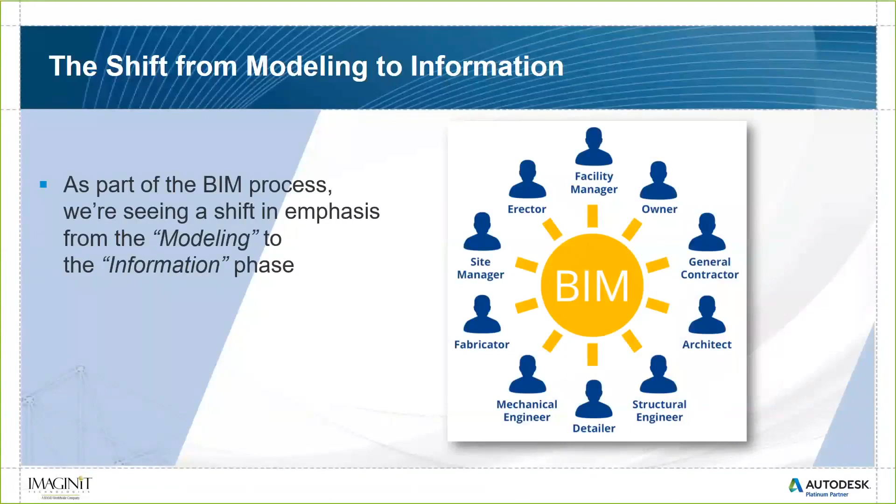So because we have these models now that are enriched with all this information, we're seeing increasing amounts of this data, and now we're trying to derive value basically from that data.

And of course, we've seen that with the cloud technology. And cloud technology in many ways isn't really new. Autodesk was in the cloud back in the very, very late 90s with Buzzsaw when that first came out, and that was absolutely a cloud product. That was way before Dropbox or Box or SharePoint or any of those things. Autodesk had already invested in the cloud almost 20 years ago.

And again, as we all know, everyone's in constant communication. It's almost overload, right? Because it's so hard to manage all that information, whether it be from Facebook, Twitter, Instagram, and all those things in our day-to-day life. And we're running into that with our work life as well.

And again, all this information that is out there, it's at our fingertips. It's on iPads, our smartphones, our computers. Anywhere where we are, we can get access to the information that we need.

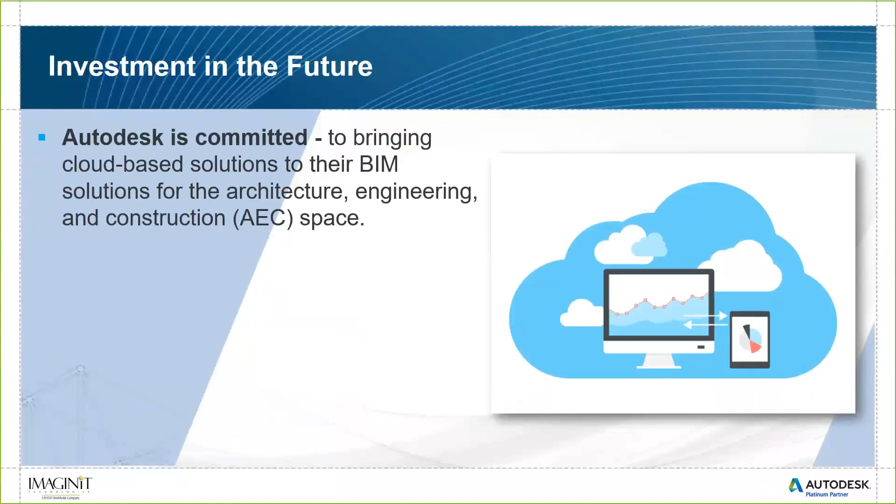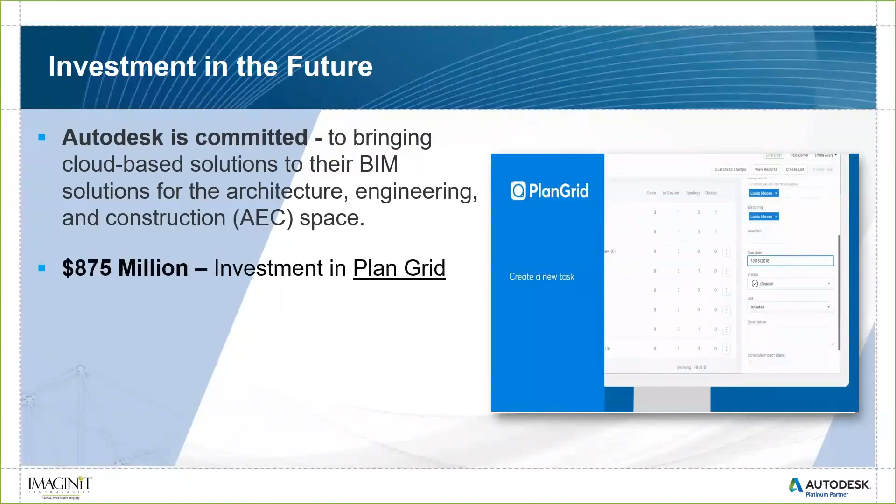So we look at Autodesk here, and they're certainly committed in investing in this future. They understand that this is where we need to be. So they're bringing these cloud-based solutions for engineering into the construction space. This year alone, or even beginning of last year, just for PlanGrid, that was $875 million investment because they saw that was a leader in the construction management industry in the field, and they had some good things there, and they wanted to make sure they could invest properly in that and make a commitment to this.

The same with their investment in BuildingConnected, because that's the other aspect here, bringing in bids and bid management, and then even Assemble Systems when it comes to quantification, cost estimation, things like that. So Autodesk is certainly committed to this industry. Just this year alone, the past couple of months, they've already invested $1 billion. That's not a small amount of money. They're putting out a large amount of their research and development efforts in this technology to make sure that it works and can deliver as promised.

So let's take a look at what do we do in our day-to-day lives as a BIM manager or really as a construction administrator. You're working on site, you're visiting the site constantly, you're gathering information, you're making sure people have drawings, the right versions of drawings and all that.

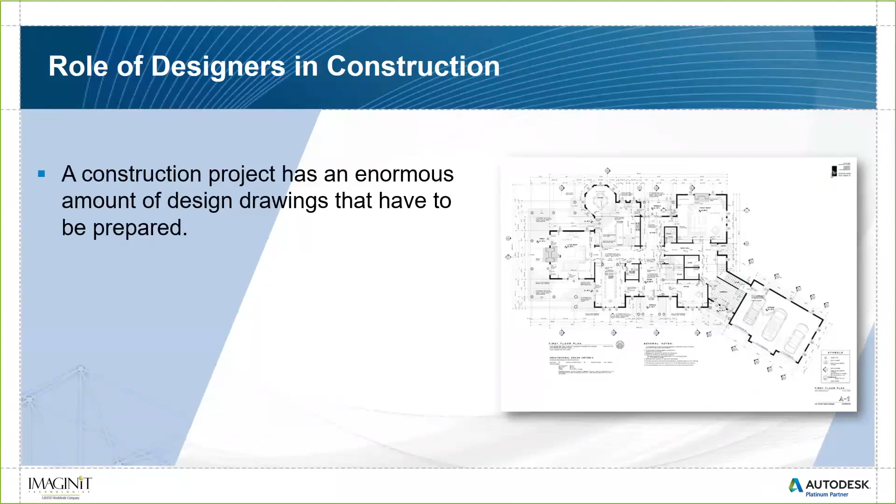So when we look at a construction project, there are countless thousands of drawings that have to be maintained, managed, version controlled, all of that we have to prepare. And really, these drawings are the basis on which the projects are being estimated, they're being built from. There's a lot of responsibility with these documents.

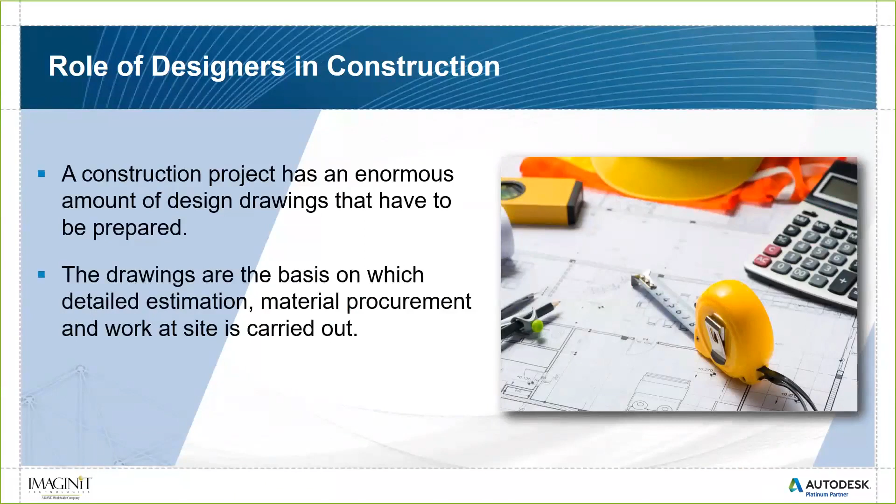And of course, version control is probably one of the most important things, is making sure that everyone has the latest drawing, the latest update, the latest addendum. That's probably by far the most important part of all of this, is not only do the drawings need to be accurate and data rich, but the right version needs to be with the right people, and we need to be able to track that.

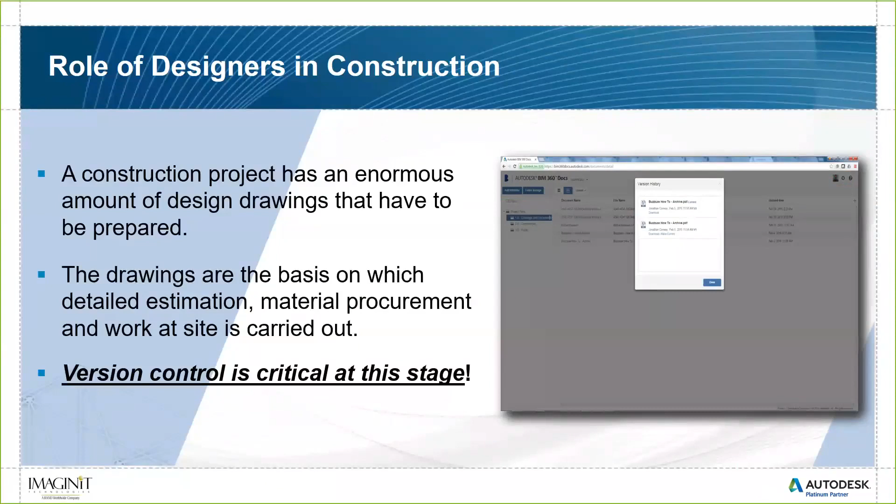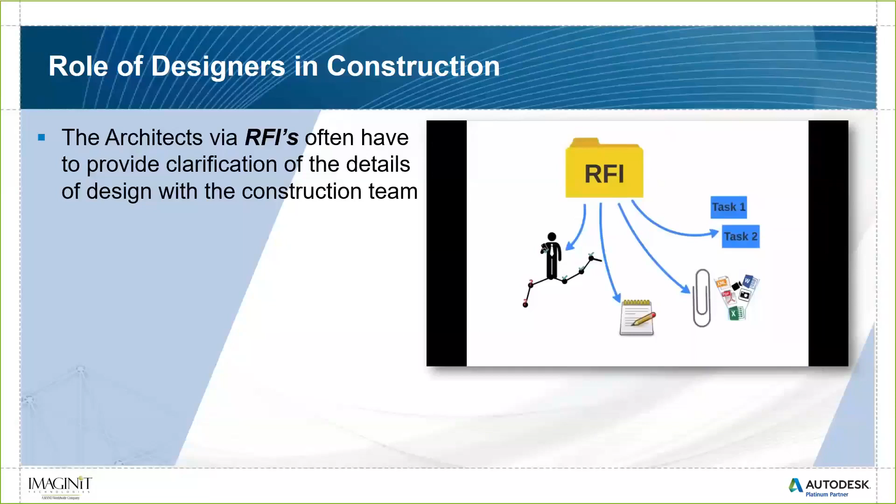And also, when we're in the field, we're often either creating or responding to RFIs. And how are we doing that? We're using paper and pencil and clipboards in the field, paper clips, PDFs, XML files, Excel documents, Word files, even videos, pictures. All those things, we're basically responding to those in different ways. And maybe we have different tools that specialize just in RFIs that are even cloud-based and such.

And we're also managing or participating in the submittal process, and we have to set up a process for each job, how we're going to respond, how we're going to send the information out, how we're going to track it, are we using email, and so on.

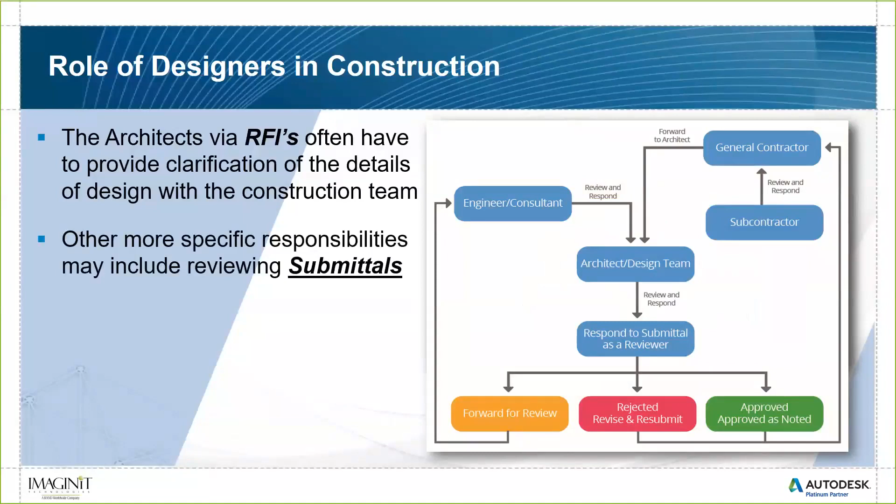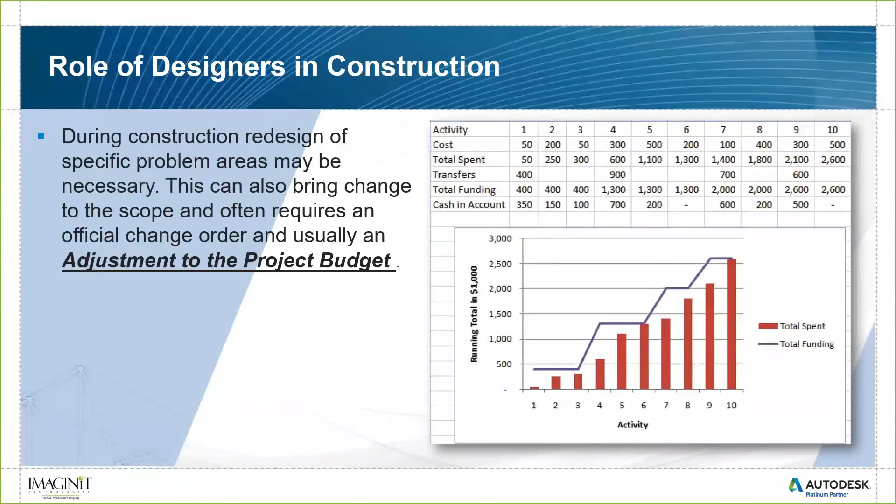And also there's adjustments to the project budget. An owner wants to change a material from drywall to granite, or change the countertops, or change the doors from wood to hollow core doors to save money, or maybe it's going to increase the cost and affect the project budget. We need a way to manage that as well.

And one of the key things we're doing, especially for quality control of our designs, is we have checklists and punch lists, and we're going through making sure things are being installed the way we envision them, making sure that if it's a mechanical piece of equipment that has gone through the commissioning process, that it works, and that there are certain things we as a construction administrator have to do beyond what a GC is already doing in the field.

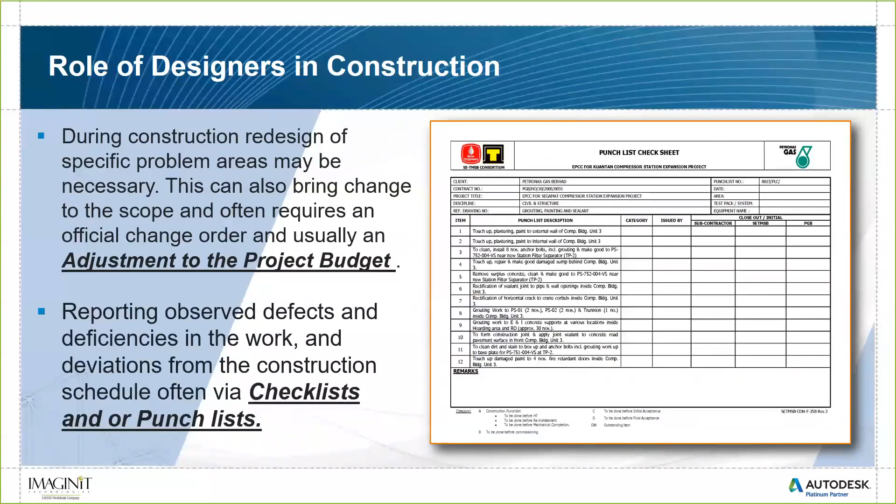So we're trying to gather all of that information and manage all that data all the time. And there are many different point solutions out there that do a very good job at one thing, whether it be managing a drawing, or a punch list tool, or maybe a submittal exchange program that we're using.

And those are all great tools by themselves, but they do not talk to each other. So every time we shift from one tool to another, we have to find a way to get that data out and upload it into the other system, use that system to track the information, and maybe get that data back out and try to get it into another system. And when you start doing that, you start having all these silos, and we lose the whole goal of having that single source of truth.

So really that's what BIM 360 is for. It's really creating that path from uncertainty to predictability. We're digitizing and collaborating online, but in a single system. We're integrating and automating the workflows, but in a single system. And because we have that one central source of truth, we have a way to analyze that, and when we analyze things, we can look at where the problems may be, where issues may have been common, and use that to continually improve the process moving forward.

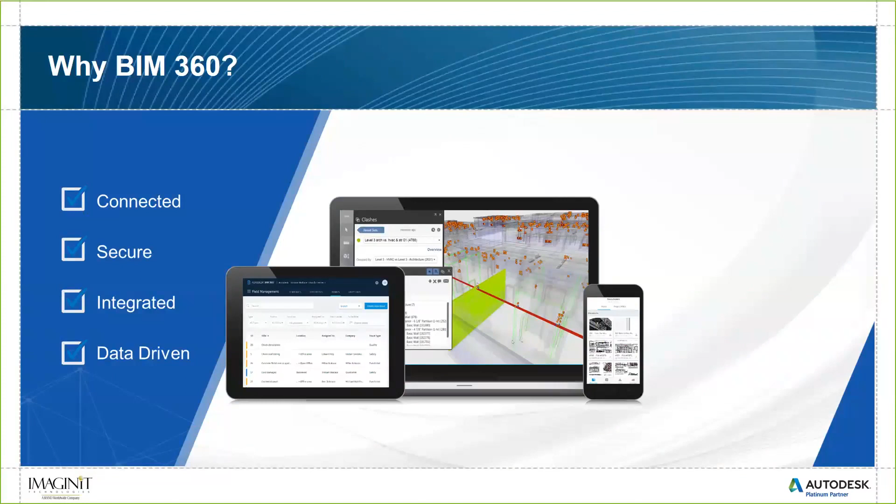So when we look at BIM 360, it's all about being connected. It's all about having information that is secure. It is integrated, both in the fact that it's integrated with itself, meaning all the tools in the suite, but also with the ability to integrate with external parties and third-party apps. And of course, it's all data-driven, just one central source of truth that all the information is being stored in.

And it's also mobile. It's connected. We can be anywhere, on our smartphone or tablet device, and still have access to all this information and participate in the process from smart devices we already know how to use. So there's really not a big learning curve with these tools. We're already using these tools every day. If you can use Facebook, you can use BIM 360.

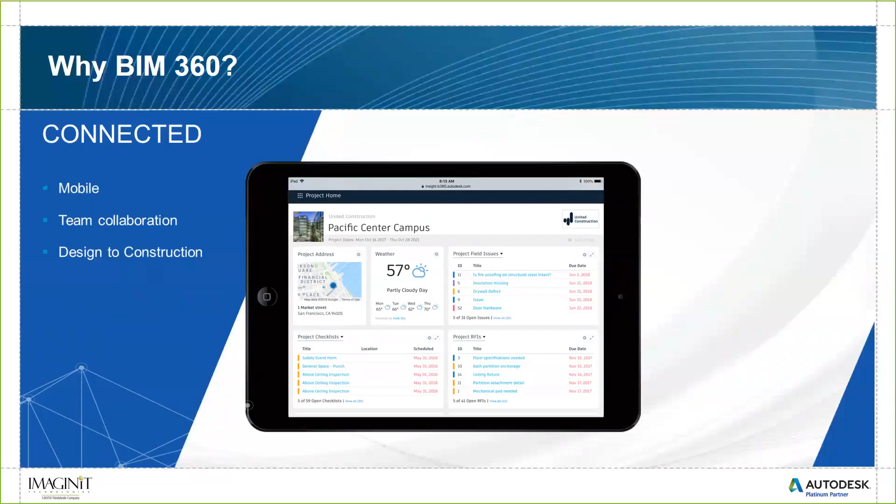And these portals are very secure, both in the fact that the only people who have access to this data is you. Not Autodesk, no one else has access to the information within your projects. And within the project, once you bring someone into the main part of the project, you have a lot of finite control over exactly what people do and see within the system. That's a very important part of this as well.

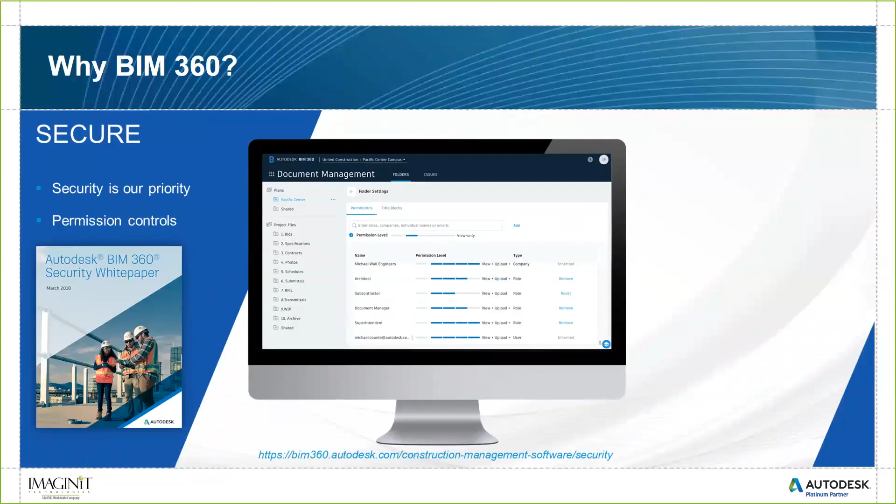And as I mentioned before, it's integrated. There are 50 different file formats involved that you can bring in and view directly in this environment. It has an open API, meaning you can have other third-party applications you might already be using, integrate and bidirectionally share data with this central source of truth. So even though you may be using another third party or siloed application, because of BIM 360 using the Forge platform to transfer data bidirectionally, you can still have a central source of truth, yet still use maybe some of your favorite applications like SmartBid, for instance.

Again, because this is all data driven, we're able to provide and create reports. We can keep an eye on issue activity, added versus closed, the root causes of our issues, or how long it takes a particular company to resolve issues. Because we have this data, it allows us to make better decisions.

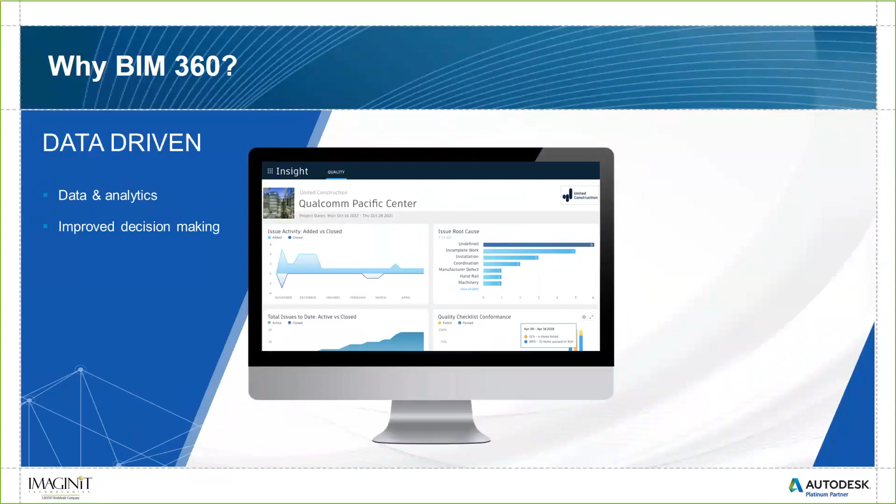So again, just talking about the platform in general here, Autodesk developed the Autodesk Forge web-based programming interface as a mechanism to organize the data so that all the tools they have are written basically in Forge. Forge itself has been designed to be an open API, meaning as long as you give someone or an application permission to access the data, all the data is freely available to be used by third-party applications and by itself, of course.

On top of the Autodesk Forge, we have the data. The data for all our projects are in this one bucket, and we use the various different tools in the platform to do different things with that information. Because all of the project information is in one place — all the issues, RFIs, submittals, all these things we do — we're able to provide analytics and insight into those things, and continually improve our processes.

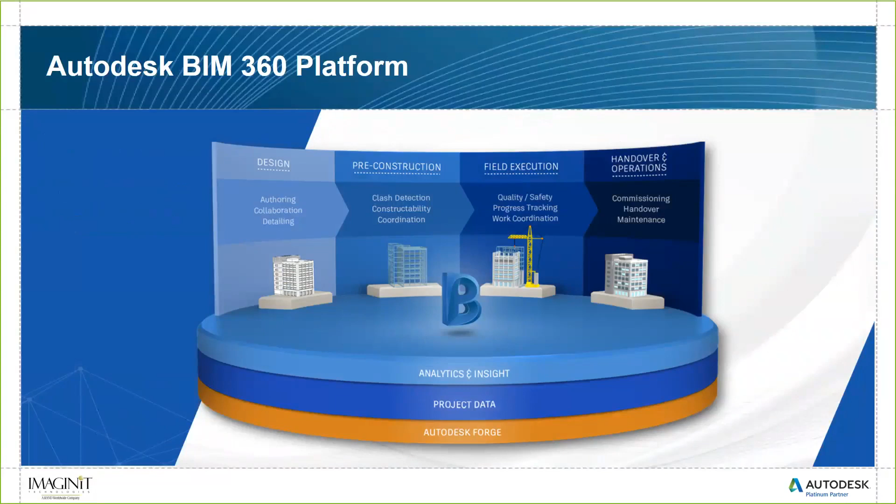We had Collaboration for Revit, which was built on Team, for live model coordination. Then we had BIM 360 Glue, for taking models and doing clash detection and things like that. And then we had BIM 360 Field, for taking the data and working out in the field — punch list, daily reporting, quality control, commissioning, all those things you do in field management for a GC.

All of these tools worked wonderfully, and they were powerful, and they worked great, but they didn't really talk to each other. There was a little communication between Glue and Field, and it wasn't bad, but still they really didn't share things very much — they didn't have shared markup, shared unification, shared issues, anything like that.

So then Autodesk saw the need that all these tools really need to integrate with each other. They created the Forge platform and rewrote their core applications in the new Forge environment. So we have BIM 360 Design, which replaced Collaboration for Revit, for collaborating with Revit cloud models in the cloud, so teams can be all over the world literally working on the same models as if they were in their office.

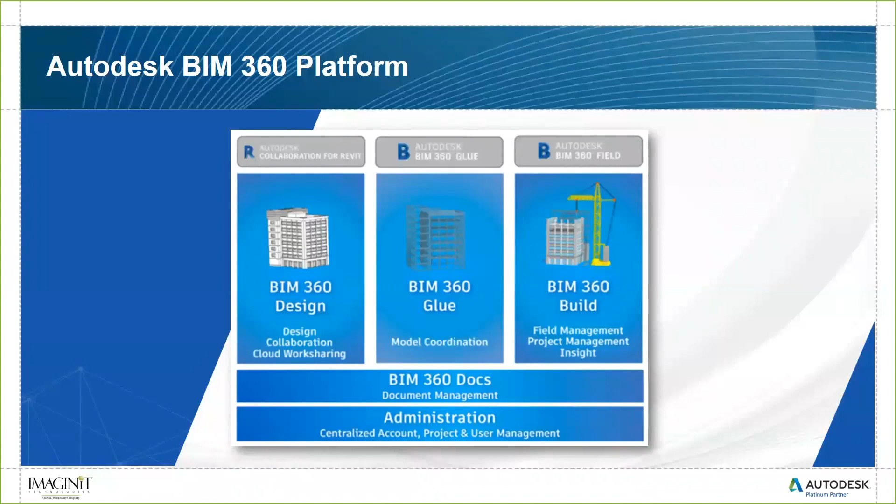On top of that, the main data management portal is BIM 360 Docs. So you start with Docs, and you can think of Docs as the garage. Then you can see Design, Glue, and Build as essentially the additional power tools you can have access to. So depending on what your functions are, maybe you just need a place to keep your information, keep your car — that's just the garage. But now I want to be able to clean my car and maintain it and make sure it's performing well — I can buy those different tools that can help me do that.

So the first part I want to talk about here pertains to managing CA in the field, which is the BIM 360 Docs, again the foundation to all the BIM 360 platform tools. The key role of BIM 360 Docs is document control — version control, accessing the information wherever you are, marking those files up, creating and managing issues. The data is portable and embedded there, with 2D and 3D support, and so on.

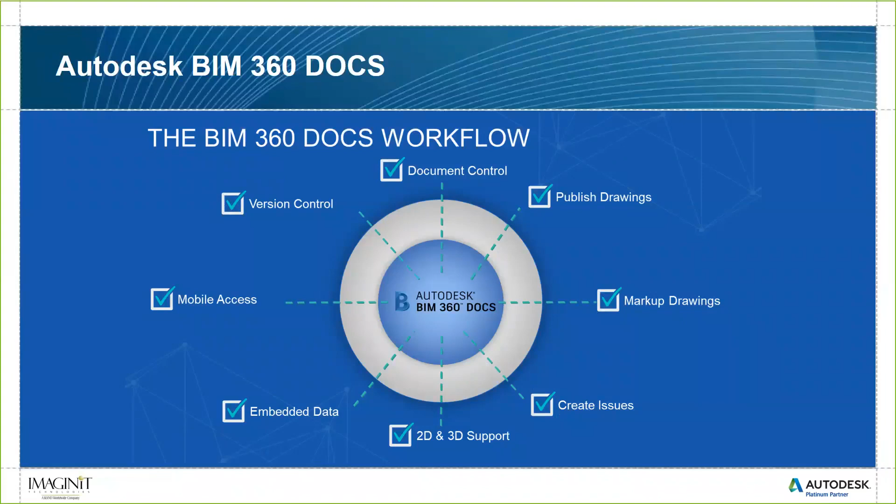So one of the key things, of course, with BIM 360 Docs is that document control. I can set permissions about who can have access to what, based on a person's name, a company they work for, or a role on a project. For all the folders, I can create all these different levels of control.

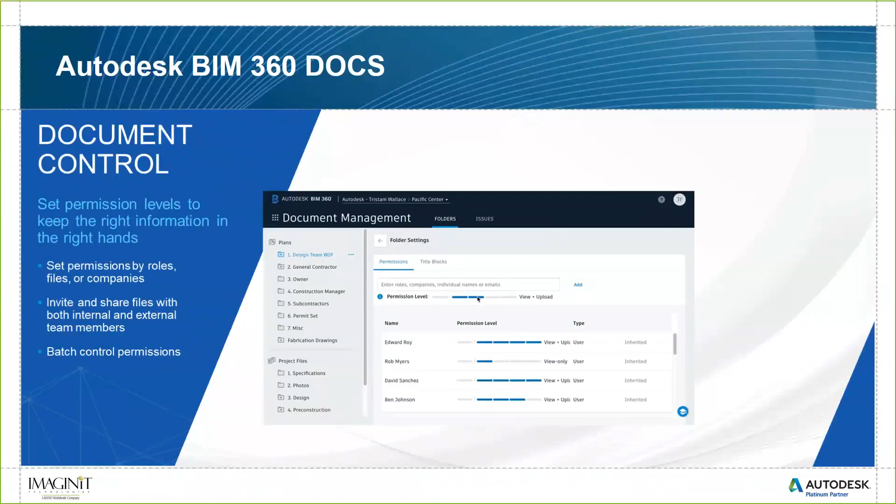Then I have version control, which is really important. As we're distributing updated drawings, we want to make sure that if something's being built in the field, they are looking at the latest updated file. That's a really important part of that.

Always one of the biggest challenges in a construction environment is that when you have printed copies, there are dozens of versions on the site, and in most cases it's almost impossible to control whether that is the most recent version. Even if you're sharing things on SharePoint, Dropbox, or an FTP site, it's still very difficult to manage that and make sure everyone has the right drawings in their hands.

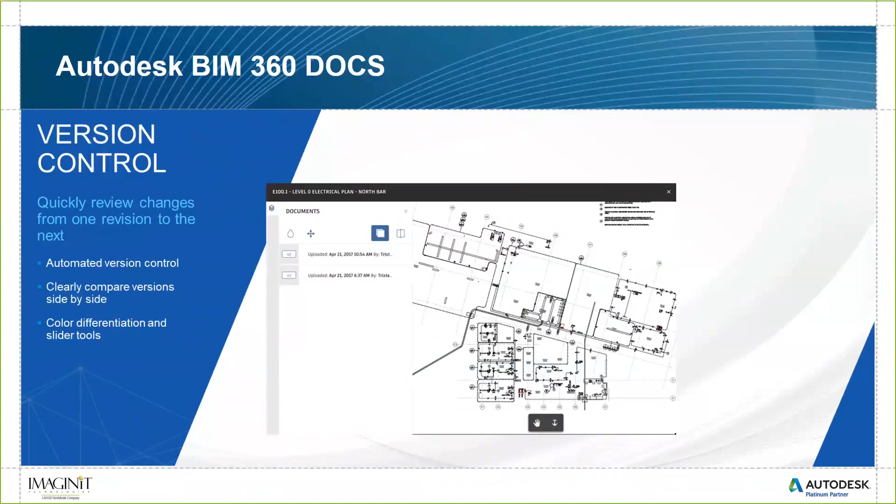So that's a really important part of our function in the field, making sure that everything being built, from the GC to the subcontractors to the fabricators, are all working from that latest document.

And then, of course, 2D and 3D support. We'll have full access to 2D, PDF files, even AutoCAD in the field if that's what you want. Or if you do have a Revit model, then you can leverage the advantages of 3D as well.

But in many respects, BIM 360 isn't about BIM. It's really just about the information in a construction process. You could have zero BIM in a project, no models, just AutoCAD and PDFs, and still use 98% of the software fully, with the exception of maybe Glue, because that's for 3D model coordination. But when it comes to Build and Docs, again 98% of that can be used with just PDF files at the core. So you do not need BIM to use this information.

If you primarily use AutoCAD files in your company, not a problem. Print PDFs and you're ready to go, or even leave them as AutoCAD—you can view those directly as well.

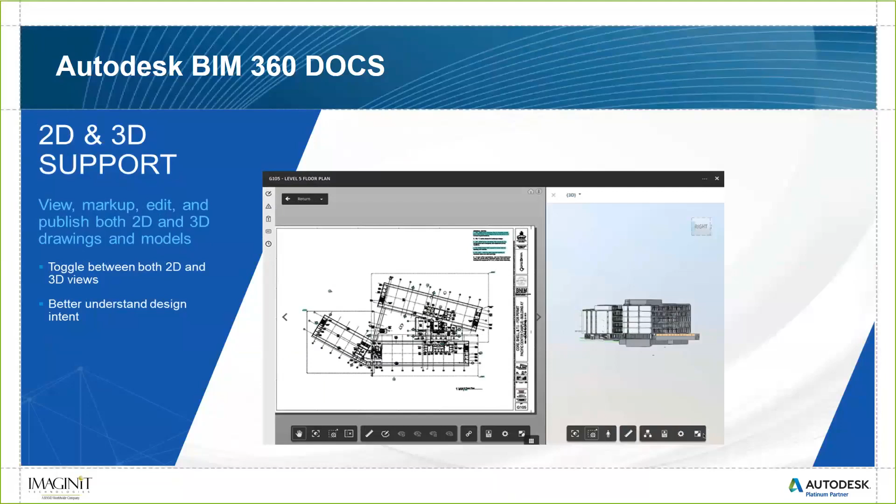And again, if you are using BIM, then you have the ability to embed the data in the projects. That data is available not only on the PC, not only in the authoring tool, but in the field as well, so all that information is available to you at any time.

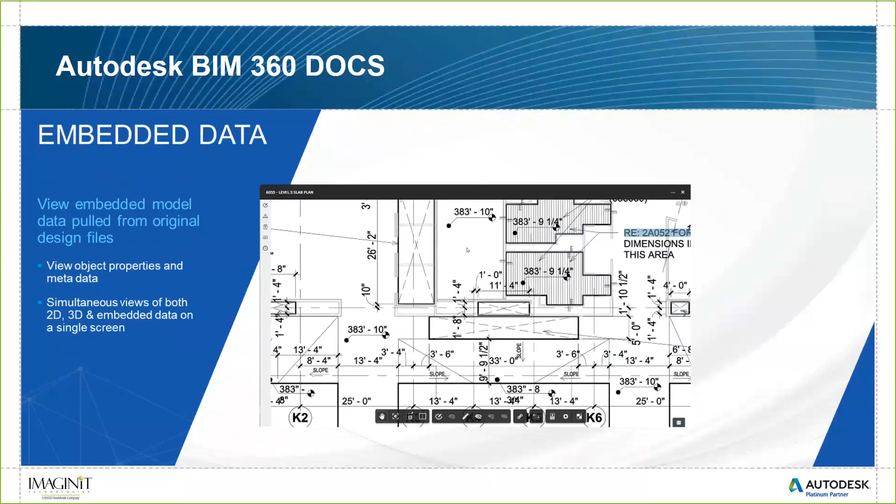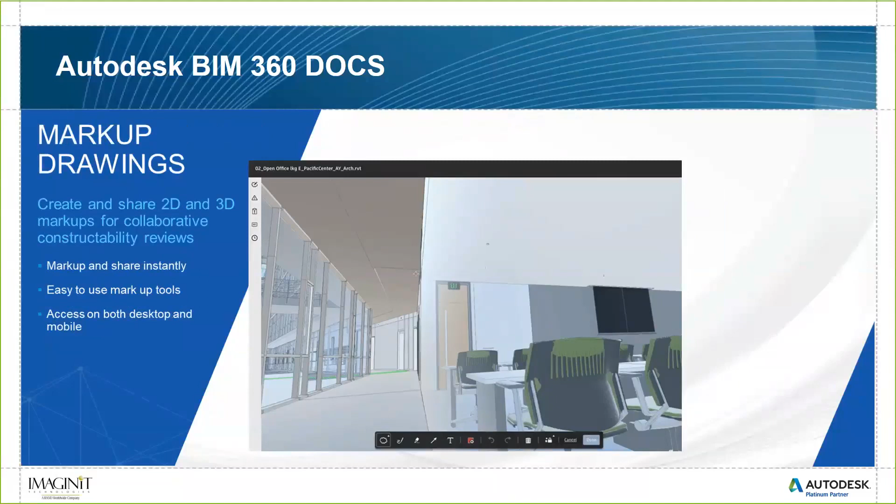And of course, we have the ability to mark up a drawing on our tablet, on our PC, or directly in the field where we find a problem. We could even take a photo and mark the photo up, then mark up the plan associated with that, all in the field right at the point where I found the problem.

And of course, I can create issues. When I find a problem, I may mark it up and assign it an issue so I can track it. I can have a full log of all the issues, who's responsible for dealing with them, and track their status from my PC, tablet, or phone.

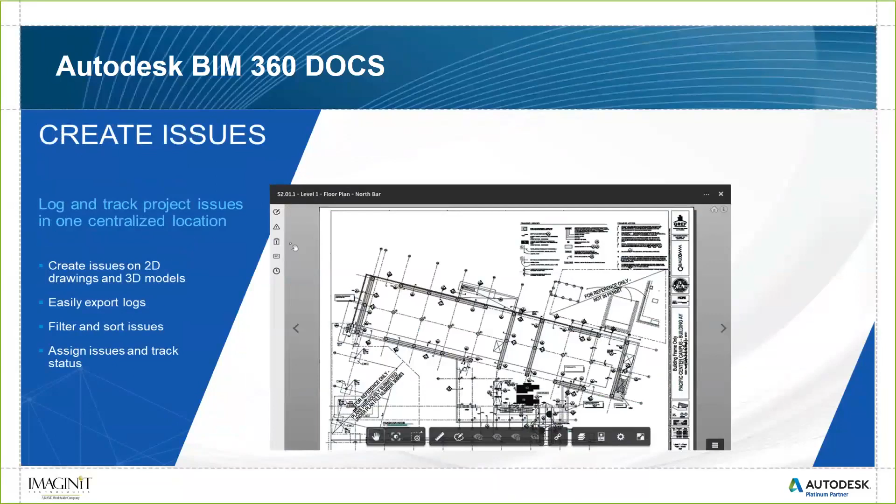And mobile access—I can be anywhere, and I don't have to even be online. I can synchronize the data with my smart device and then be offline while I'm reviewing or walking the site, marking things up. Then when I get back within range of a Wi-Fi signal, I can synchronize the data.

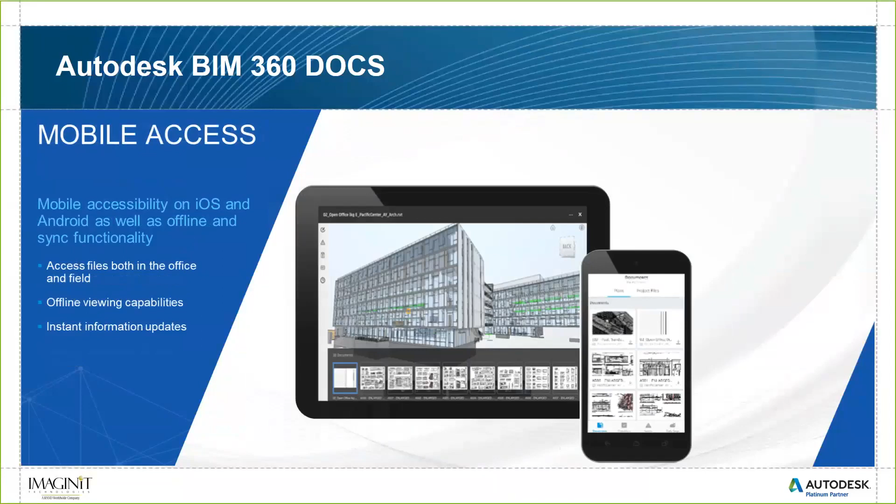You simply need to make sure you synchronize the data at the office or wherever you have Wi-Fi or cellular. Maybe you're in an area like a deep basement with lots of metal—the signal may not work there—but you can still do your job, still create your issues, and when you have access to the internet, it'll just synchronize automatically.

So let's take a quick look at the Docs interface here. Again, this is all cloud-based. There's no software to install, no IT involved. The responsibility of IT is just, do I have internet? Yes—then their responsibility is done.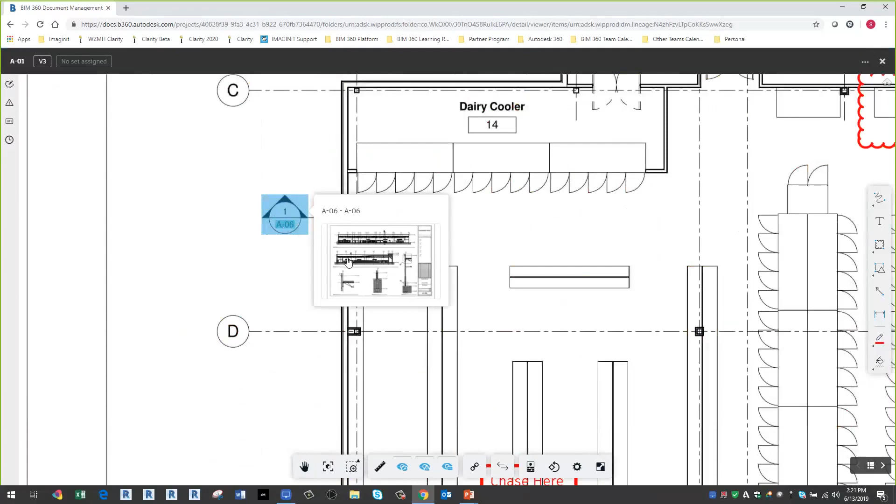So it saw that there was an A6 sheet, it sees that there's a callout. So using AI, it scanned the file and said, oh, these look like callouts, I'll connect them together. So I can click on that, and that would take me, in this case, to my section drawing. That was done automatically through no action that I have to do other than upload the file.

If I go back over here to the Revit sheets here again, I see that version control. So I can see that that's version 3 of this document, it's version 2 of this document, and so on.

If I go into a 2D model, start with a PDF, and I look at this in version 1 here, and I'm curious - or I should say version 3, this is version 3 - I'm curious what changed between maybe versions 1 and 3. Well, I can use my comparison tool now and compare 1 and 3 against each other.

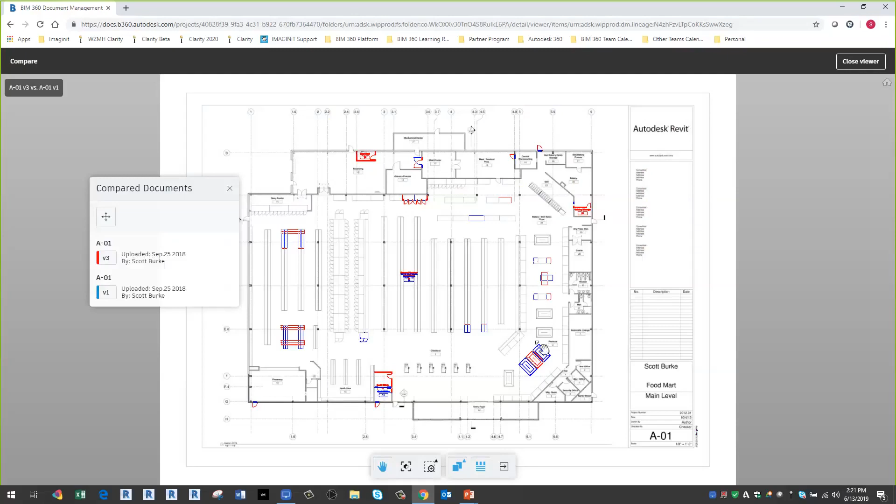Run my compare tool. I could be in the field if I'm on my PC, or make sure before I go to the field, I might want to look for the areas that have been updated. So I'm using this as my planning tool. Before I go out in that field, I want to see where the areas of change are, because that's the parts that I am going to visit.

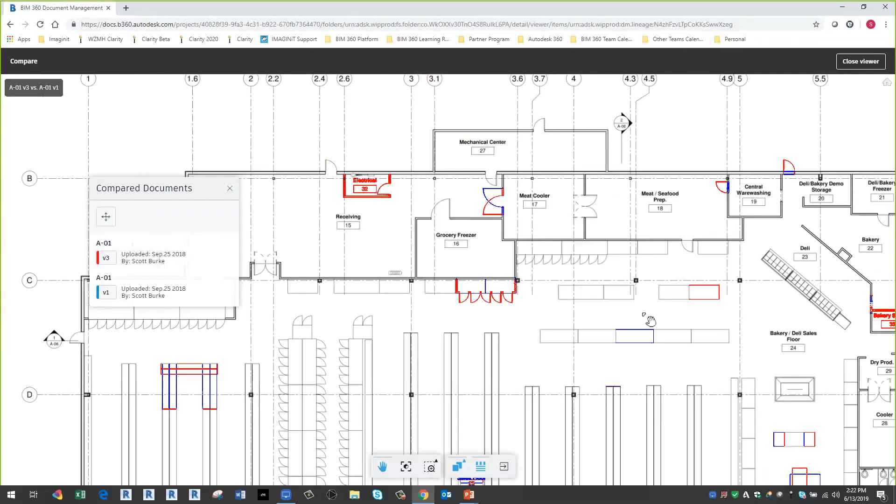So I see all these areas that are color-coded here, knowing that red is new, blue is existing, or where the original document was. That means when I go to the job site today, these are the areas that I'm going to check on to make sure that they're following the new plans. So those are the important parts for me. I've identified those, and then once I've seen the color coding there, I can even change the way I view this, make it side by side.

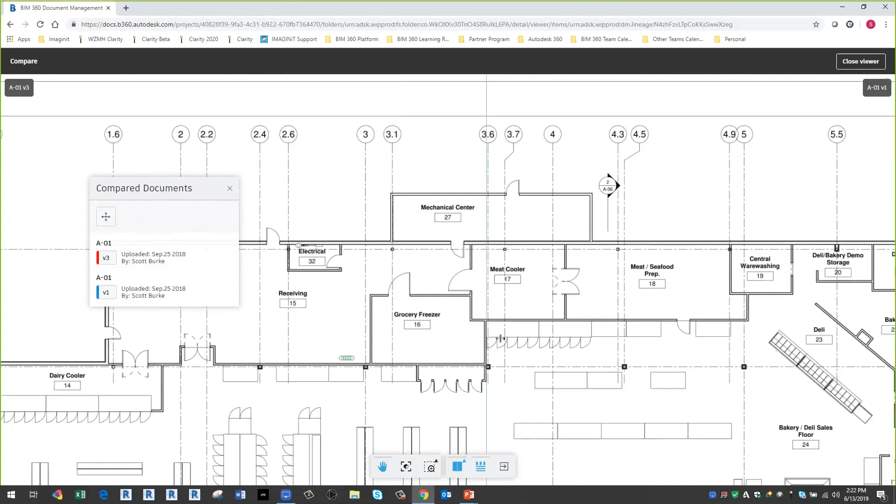Oh, now I understand. Originally, we had some shelf units here, but we really wanted to put an enclosed refrigeration closet here. Maybe this is where the beer storage is going to be in the grocery store. I'm able to very easily see those changes, identified by color, and I use the slider here to understand the differences. Really powerful tool.

Again, if we start using BIM, we have additional information. Inside this Revit file I've uploaded, I can run the comparison tool, but the difference here is that this is intelligent information. It's not just going to visually show me everything, it's actually going to provide a quantified report of all the changes. I can see that there are 39 added elements, 10 that have been removed, 37 that have been modified. They're all color-coded.

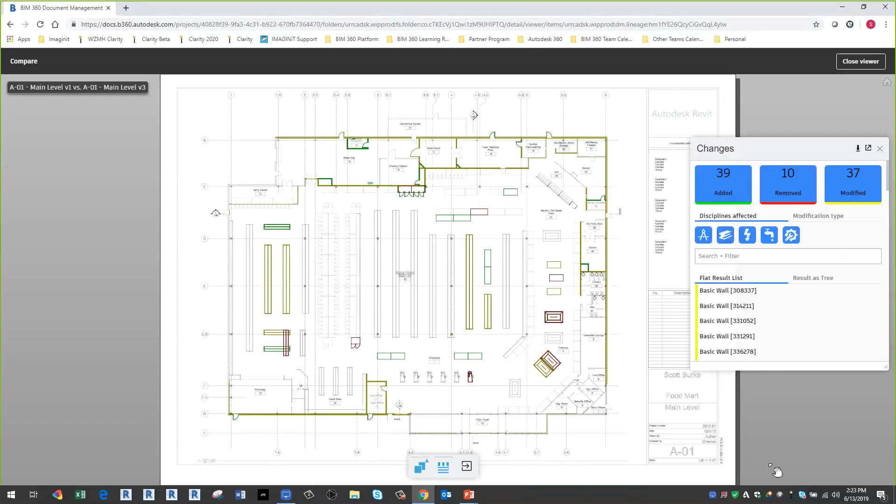I could isolate this to only show me things that were added, so only the things in green here are shown. I could see just things that were deleted, removed from the model. I can see some shelving units were removed. What was changed, what was modified? Here are the objects that were modified.

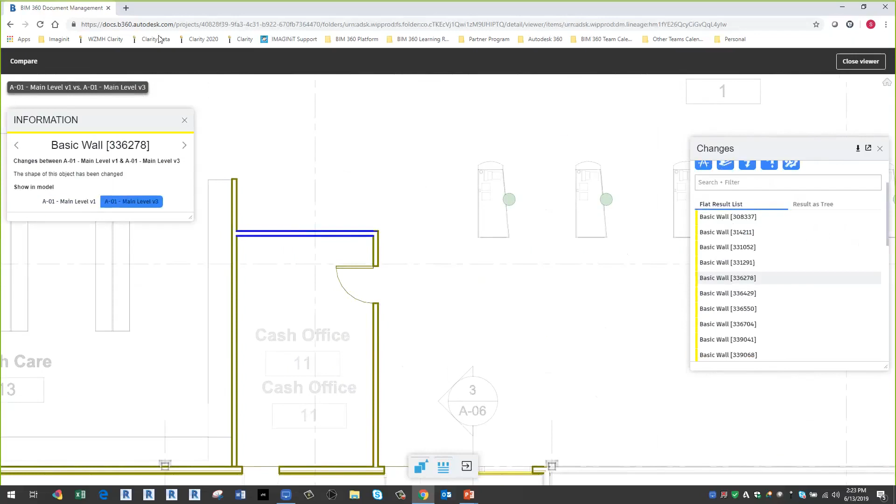I can select one of the doors while I'm in here, because these are objects, and I can see the door used to be here, and this is the new location. What about this wall? That was modified. Oh, it was over here, now it's over there.

If I want, I can come back in here, either leave it this way or turn everything on, and export an Excel document of every single change, including all the Revit IDs, so I can find the objects. Every single change from versions 1 to 3 has been recorded, because this is an intelligent model, so I can record it via object type.

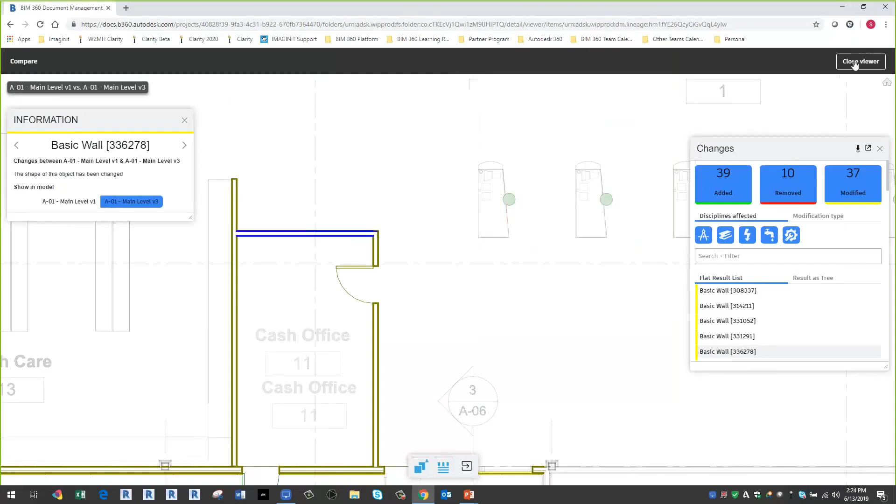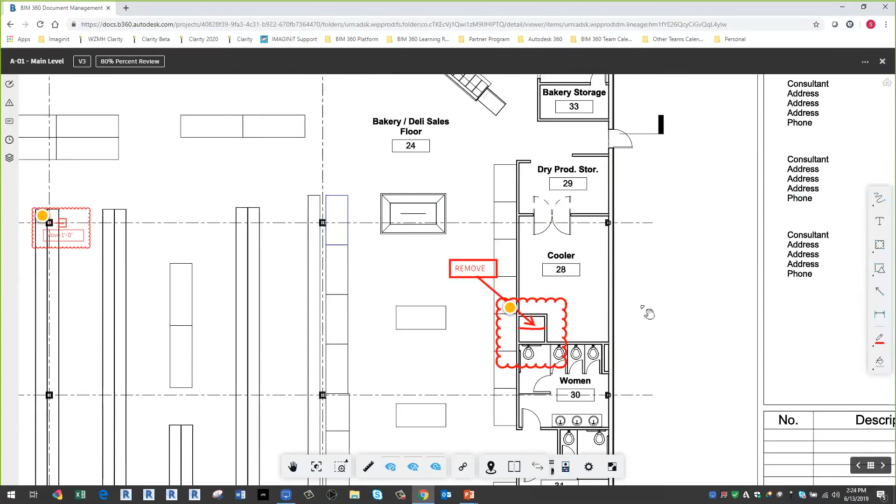Again, when I'm in the file, the data and the properties are available to us. So when you have a Revit model, you have that extra ability of picking a device or a shelf unit, going to properties, and then all the Revit information is available to me here. Any of the information we've embedded in that object from Revit is available to anyone that has access to the project.

Also, when I'm in the file, quite often we want to get in and see what something looks like in 3D, or get a better understanding of what it would look like if I was standing somewhere. So I can use this tool to pick a point on the drawing, decide where I want to look, and it will then take me automatically to the 3D view.

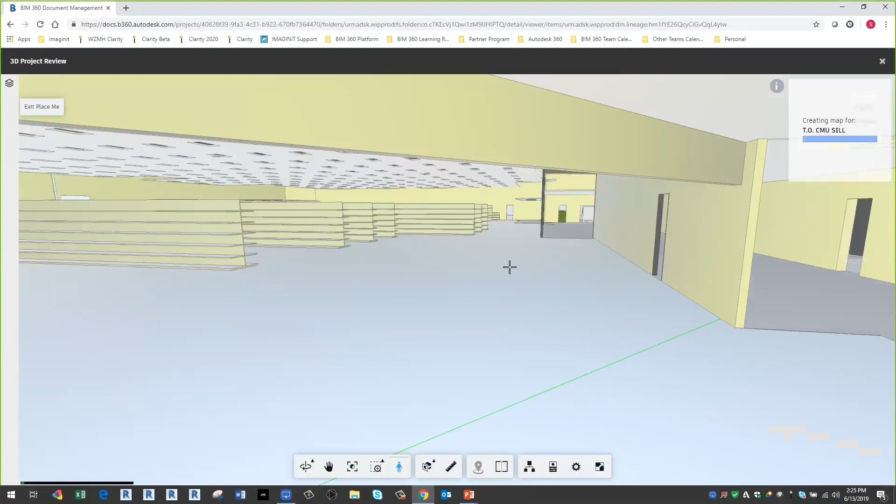Now standing at that location in that orientation and direction, it shows me what it would look like from that viewpoint. And not only does it show me that, but once I get in here, it just takes a second to generate. Now I can actually navigate and walk around in that project right from one place, even use this as augmented reality where I could be standing in this location in the actual project and see where the problems might be.

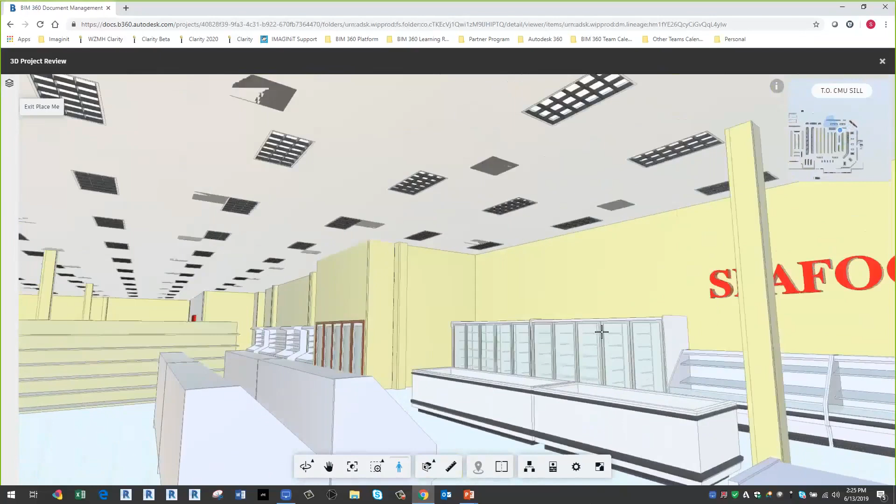And see where the sign should be, where the sight lines are, where the light fixtures are, all of those things. Get information on the ceiling, turn it on or off, whatever I want to do with that information is available here. I could hide it because I wanted to see what was behind the ceiling, and now I have that information too. This definitely adds value when you do have the Revit models.

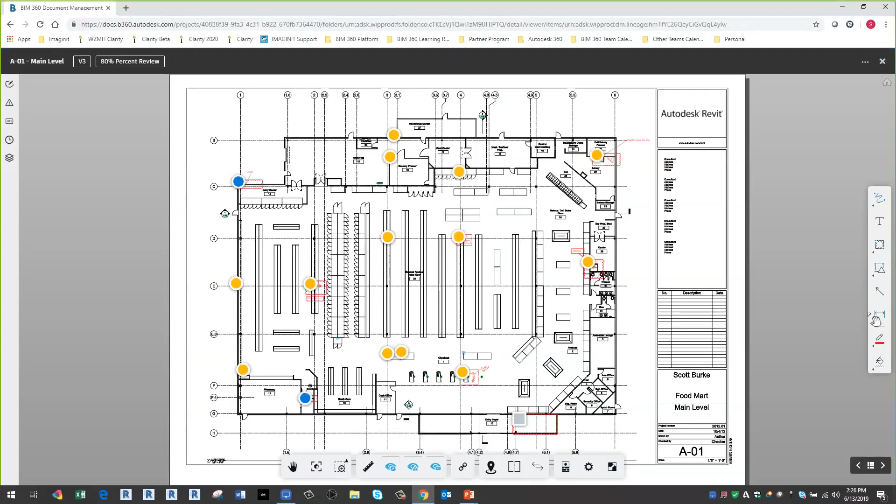Another powerful tool, of course, is the ability to mark things up. I have all types of markup tools over to the right here. I can very easily come in and bubble an area, control line weight and color of that bubble very easily. All very intuitive controls. I could freehand things.

I could do this on my tablet device or the iPad and so on, arrows, dimensions, text, whatever I basically want to do. And these markups can either be personal for me or published for the team.

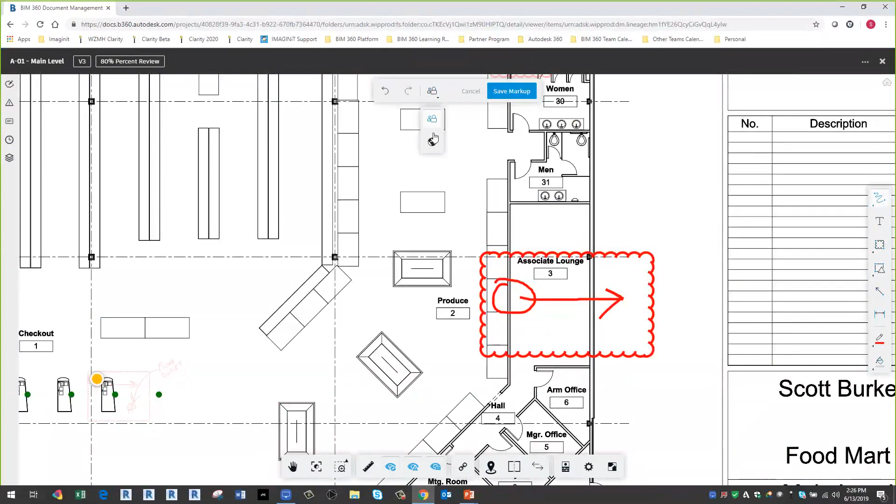Once the markups are created, you have the master markup list here, and you can see I can go to any markup just by clicking on it. They're all version specific. Once a markup is completed, I could basically say it is completed and archive a markup.

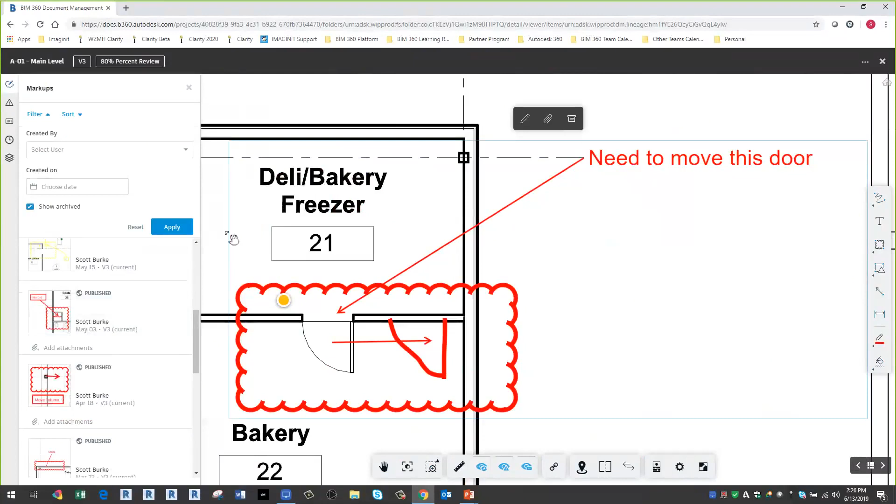If I want, I can use the filter tool to show me all the completed markups. So now I'm showing archive markups that have been done. This one right here, for instance, was on version 1 of the file, but it's already been done. It was archived, it's completed, so it's gone through the cycle. And I can, of course, turn off the ones that I don't need to see.

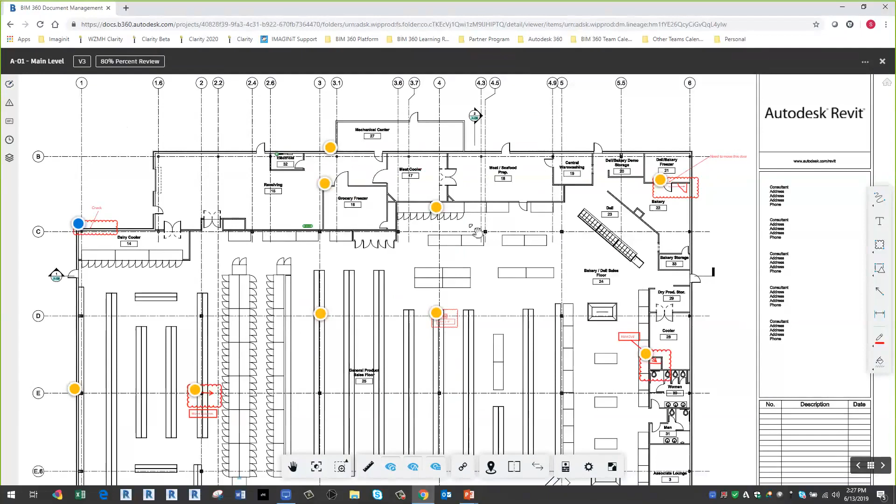The next very important tool is the ability to manage and create issues right from the drawings or just directly from the issue area. So right here, these are issues that were created either on the PC or I'm walking around with my tablet device and creating an issue and then managing that issue from that one source.

I can do this both in 2D and 3D. Again, if I go to the 3D model, because I've made sure I provided that as well, I have that 3D reference model. I can take sections, I can walk around in it this way too, or use a plan to get to the area that I wanted.

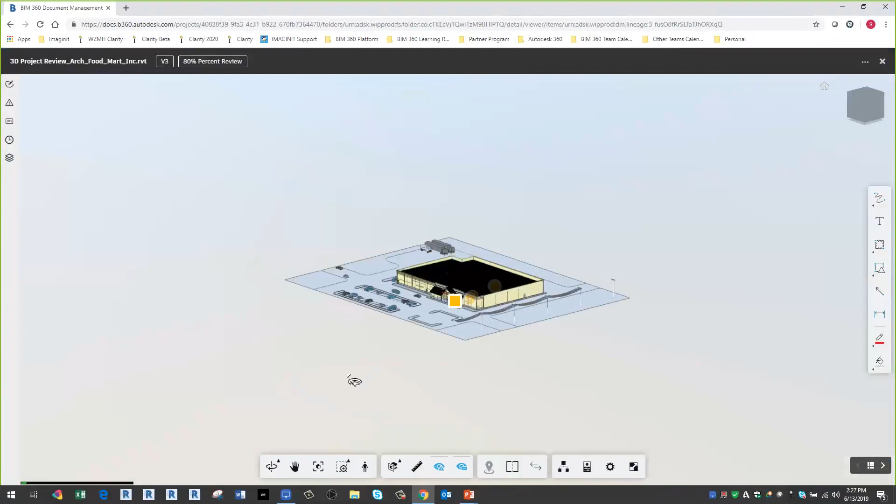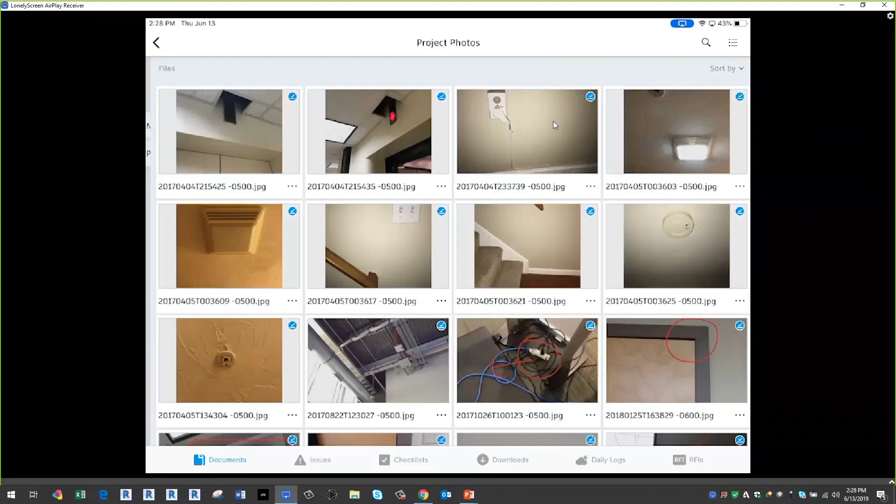If I take a look at the iPad side of things here, I basically have access to all this information right at my fingertips. I can open up my BIM 360 app, go to my plans area, or my project files where maybe I've taken photos on the site that I want to record of issues that I've had, or I can go directly to my drawings. I can go into my Revit sheets, into that same file, both in 2D and 3D.

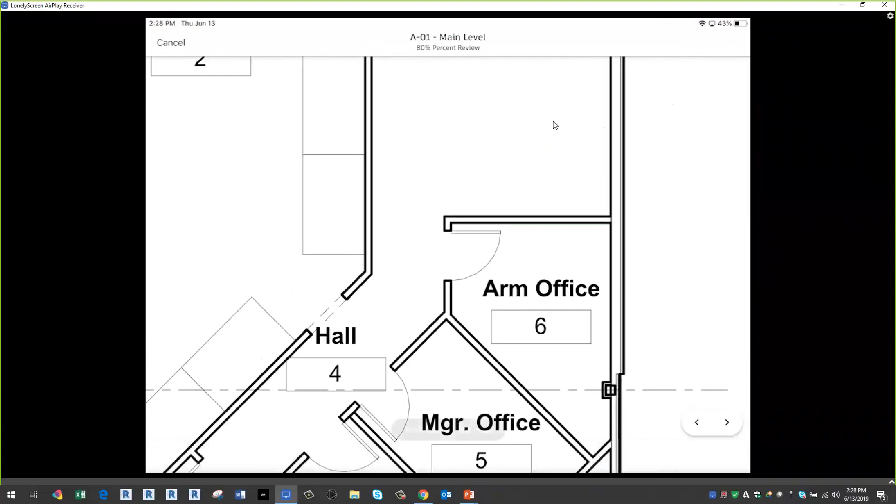There's the same information. I can come in here, and if I have an issue with maybe this door, I needed a size or I needed to swing the other way, whatever. Right in the bottom here, issue. I can tap to create an issue marker. That's where I want my issue to be. I can set a status for this.

I can set, well, what type of issue is it? Is it a room inspection? Maybe that's what it is. And, need to do punch list. So I'll type that in here.

If I want, I could add a photo. I could add more information to a description, who's responsible for this, or what the issue is. So I might come in here and say, well, this person here is responsible for that.

Where's the location of the building? So maybe it's in the main building somewhere, and I preset up locations here. Maybe it's this, I'm just going to say it's near the security office here. So that way I can categorize my issues and find them and sort them.

I can say, well, when do I need this done by? It needs to be done by the 19th and so on. And who's the owner? I'm the owner. Is there a root cause here or something like that? So what's the root cause of this issue? In this case, it's a documentation conflict. Who's it going to be performed by? This person right there. And I can create that issue.

I'm done. What we do beforehand, we get a clipboard out, write down something, maybe take a few photos with our phone, go back to the job site trailer, try to gather the information, rewrite out the report, pick up our email list, try to remember who I have to assign this to, send out a dozen emails hoping it goes to the right person. Hopefully I'll get a response, but I'm not sure who's responding to it. I have emails, PDFs, documents, things in SharePoint all over the place.

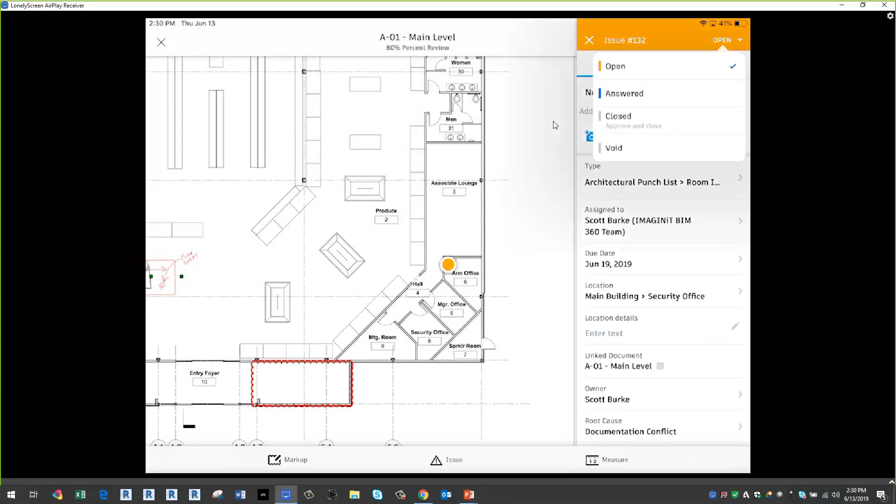So anyone coming in that day, I could come in here, go to my master issue list. Let's get out of the drawing here. Here's the master issue list, all the issues right here. I can go in and filter those by just the ones that are assigned to me. So on that day I come in, these are all the issues I need to respond to.

And then I could also look for, but only show me issues, filter by status - maybe answered or open. So what do I want there, or the type of issue? The status here, I get to say show me just the open issues. So now just the open issues are listed, or maybe just the answered ones. I pick that, I have all my data.

One place, one single source of truth. I'm in the field walking the site. I see a problem, I create an issue and take a photo. It doesn't have to be part of a drawing. Again, I have all that information at my fingertips here. So really powerful tool in that regard.

So then we start getting more into those Docs tools, and some of us may already be using that. If we're using BIM 360 Design, everything I just showed you, you have access to. If you're collaborating with Revit right now with live models and using BIM 360 Design, you already own these tools. If you don't, maybe you just want to go at this level - you don't need some of the other things I'm going to show - you could start with Docs and use that for your construction administration, just for the document management side of things.

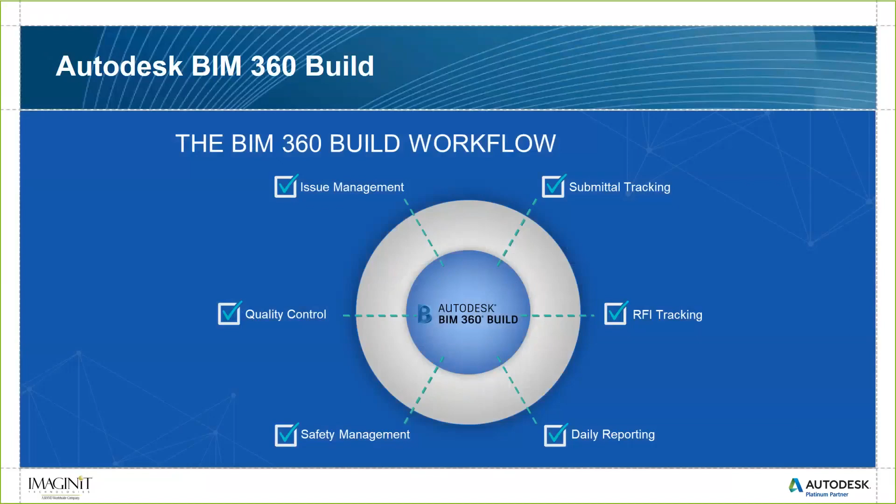Again, quality control, punch lists. You may or may not be using safety management - that's more for a contractor. RFI tracking, and even daily reporting if you want to use that tool as well. But I'm just going to really focus on the tools that I see someone using in the field.

So, of course, RFIs, right? Request for information. We're always having people asking us a question about something. Maybe they're in a 3D view like this. They put an RFI in question and ask, hey, what type of window is going here? What's the thickness? Is this door swinging the right way? What's the lock set? The information is missing from the drawing, whatever.

They're able to go right at the site, create an RFI, assign it to someone, and wait. They're done. They don't have to fill out any further information, don't have to check their email. All they have to do is have that device open. An email might come in saying that it's been answered, because that's what email is used for - a notification system only.

All data is only here. Email is actually out of this equation. There's no email involved here on purpose. Email becomes a notification tool - a very powerful one - but that's it. No data is conveyed in email. All the data is stored here.

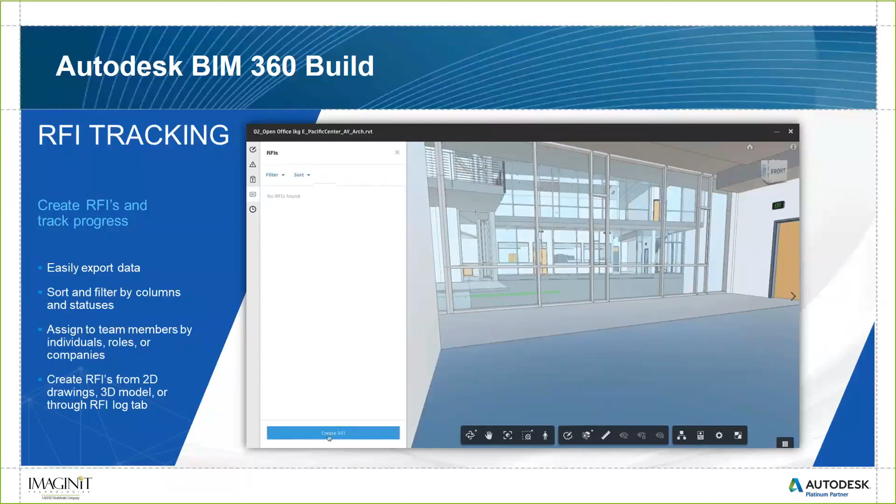Same with submittals. In this case, you create items that you assign to maybe different subcontractors who need to get some shop drawings in, because your job is to review those shop drawings first. Once you've found those, you can add them to what we call a package, and then submit the package for approval, which would be a collection of different subcontractors who have added their data to it. You're able to manage the process now - you have a designed process that is repeatable, that you go over and over again to do this. Then all the data that gets submitted can be added into the document control system, and there's all the latest documents.

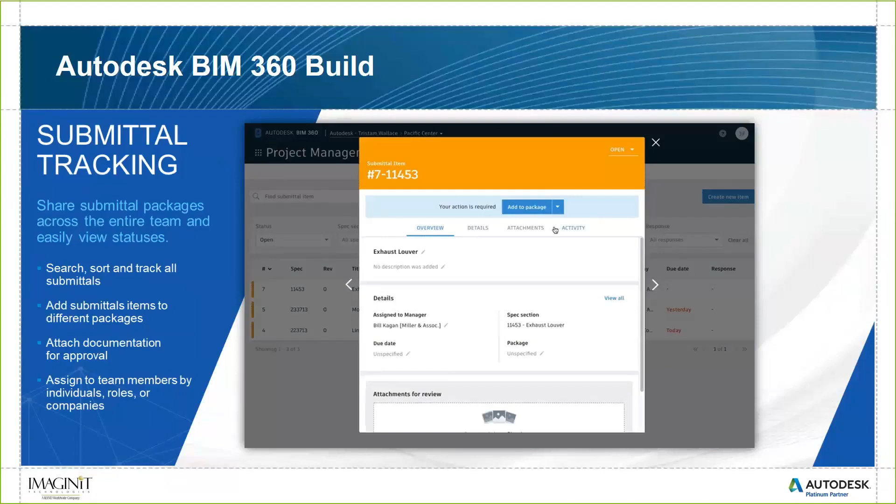And of course, quality control, in this case checklists, punch lists. One of the key things architects are doing during construction, during pre-delivery to the client, when we're closing the project out - we've got to make sure the rooms are painted, the room numbers are on right, the faceplates are on all the outlets and things like that. The HVAC system is working, the warranty information is gathered and given to the client and delivered - all of those things. So we're able to create our own custom checklist based on what our specific business needs are, and walk around that site and just enter the information once.

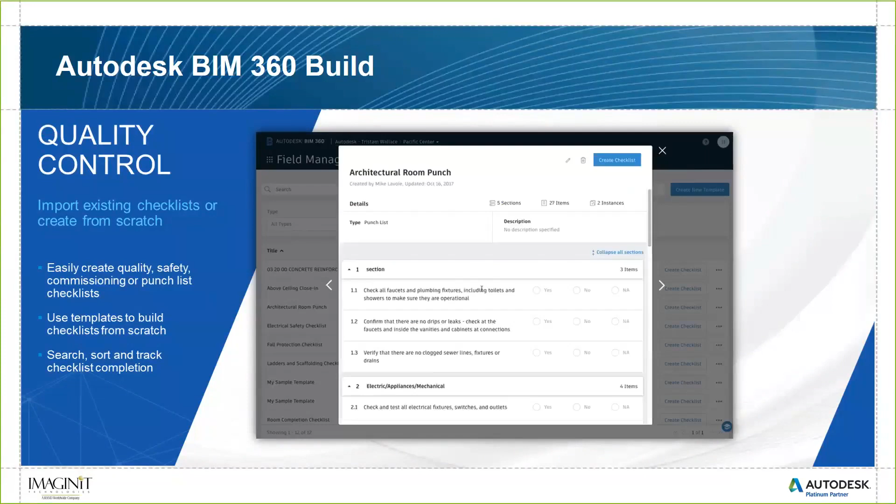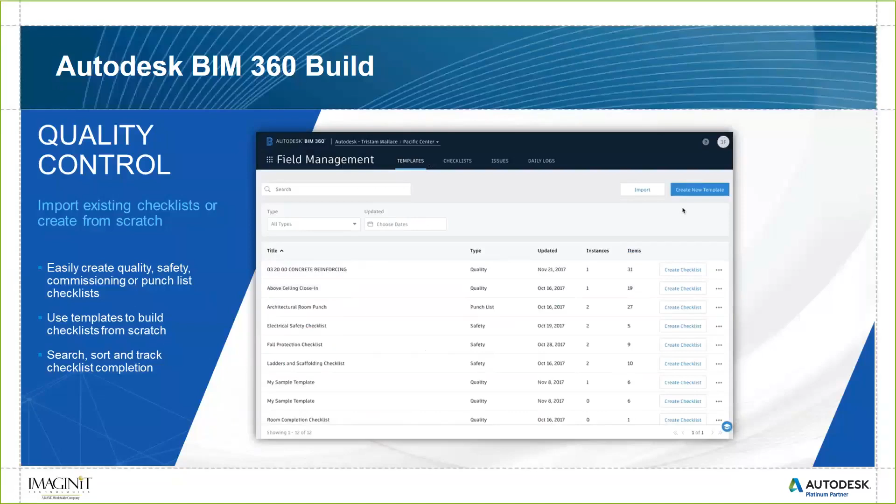And that's really more the key, the real key to all of this - that single center of truth here, that single source of truth that everyone basically has access to.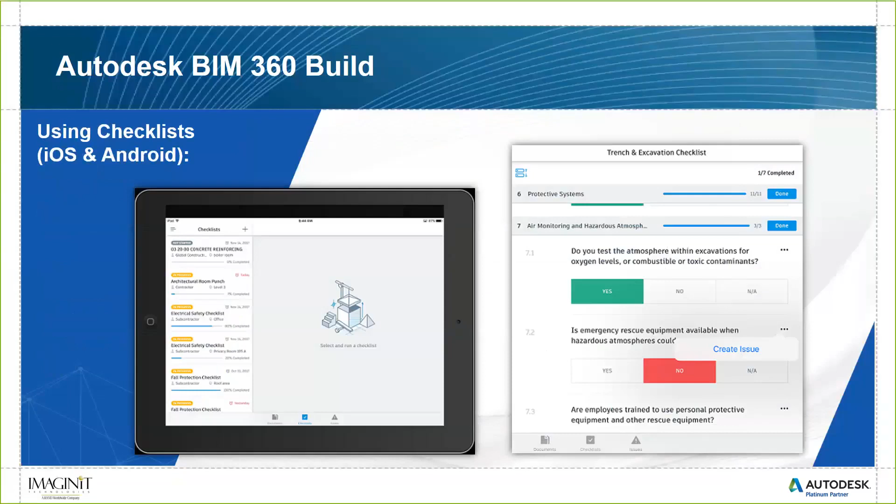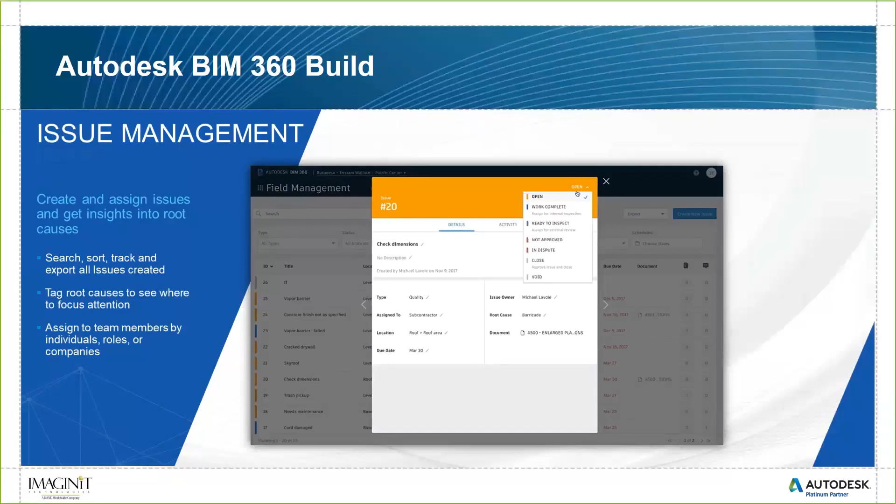The checklist's primary function is to be filled out in the field, and I'll show that in a minute. The issue management created from those checklists is all part of the same consolidated, unified issue management system across all the tools.

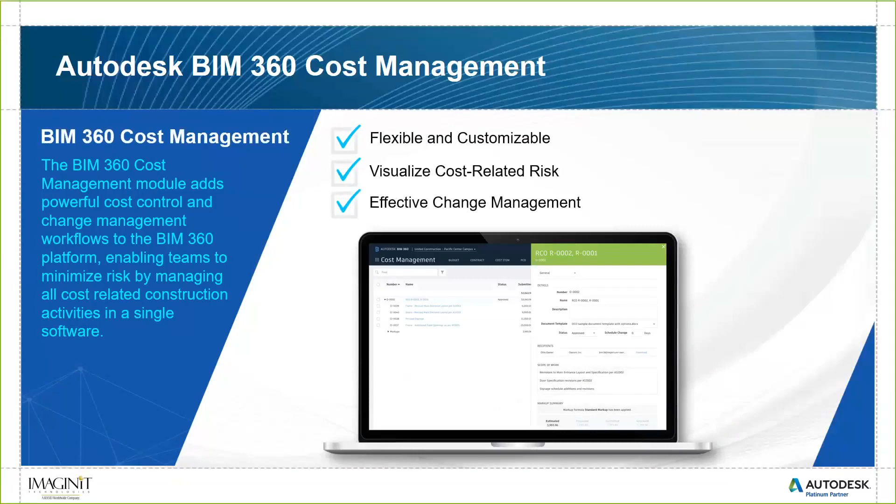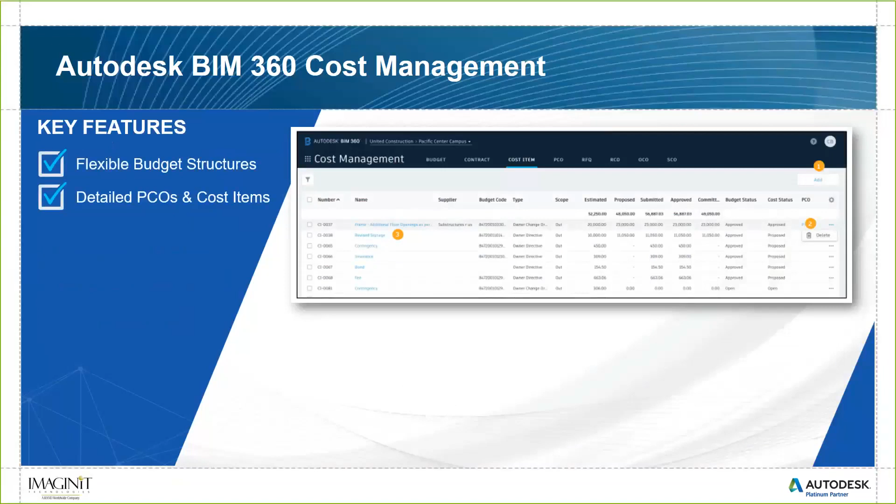A newer tool available for anyone who has BIM 360 Build is a cost management module, kind of like a sub-module for Build. This allows you to manage change orders, that's its primary function at the moment. It lets you manage the budget based on change orders, customize it, and visualize cost-related risk. You can create your change management orders through this system and manage those. Key features include setting up your budget structure, detailing potential change orders, owner-generated change orders, and cost items. There's now a specific change order workflow you can follow that's basically automated.

With all these tools and data, we're able to analyze that information. As I'm walking the site gathering data, someone back at the office could be looking at the project home, the insight pages in the system, and see our RFI issues, our submittal items, all in a singular dashboard. I could even have job site cameras integrated here automatically. It's become almost standard operating procedure to see cameras on site, for security, but also to see the status without having to go to the site every day.

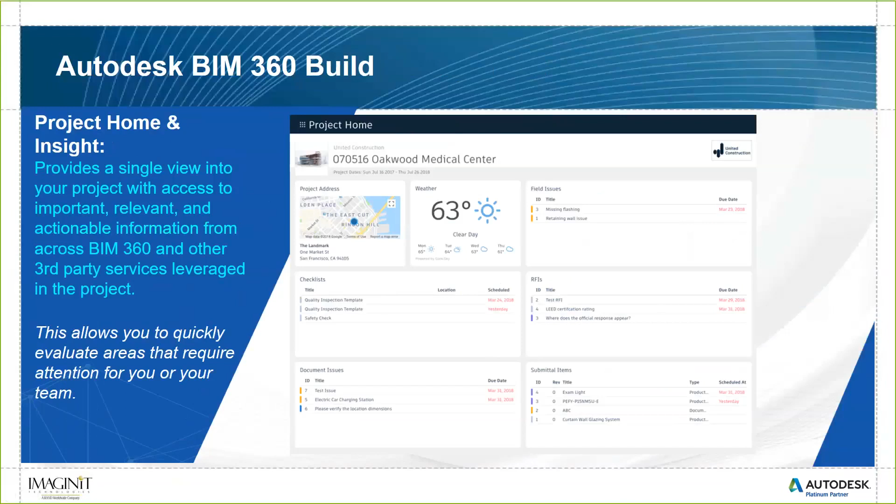So let's go ahead and pop into BIM 360 here. Again, it's one platform, one unified tool. We've already seen the document management part. So if I want to go ahead and start managing other processes, whether it be RFIs or whatever, I can go up to my project management section first, and I'm going to go to project admin.

As an administrator, I want to set up what my process should be. Right here under project management, I can set up some workflows. Under RFIs, I want to set a workflow: there's going to be a creator, a manager, and a reviewer, and here are the people who can be a creator, manager, or reviewer. I can have more than one person here, or a company. I could change the workflow and add a second reviewer as well. So I have different predefined workflows that the RFIs will follow.

Now with an issue, you just create it and assign it to someone. RFIs are very similar to issues, except they follow a very specific and designed workflow. That's the key, you can create those workflows ensuring the right people are notified. That way, if someone creates an RFI, they don't have to know who the manager is, because it's pre-assigned and will automatically go to that person. Anyone who's a reviewer knows they're going to be a reviewer, and they will get those RFIs for review.

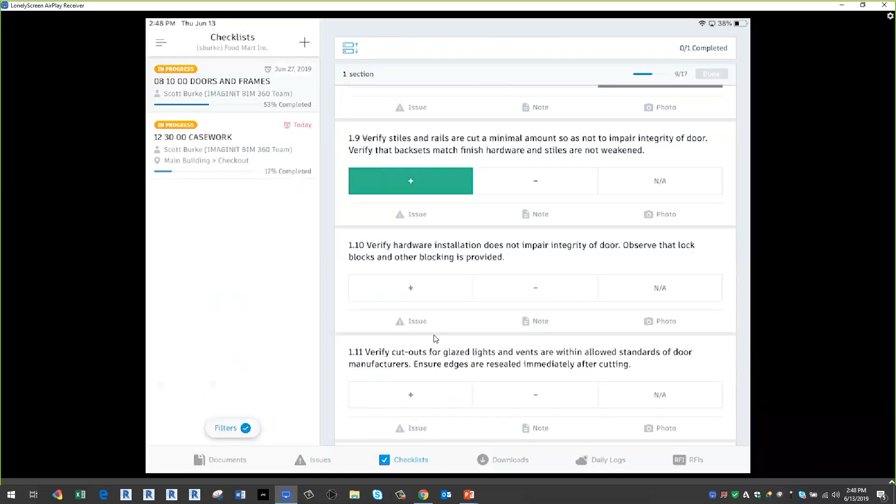So now I have access to all the checklists. I can assign them to individuals, who would have the app, open it up, and see all the checklists assigned to them. And again, here's my whole log right here—every checklist I need, I can filter that by whatever I'm looking for. So it's very important to me, all of that's managed here. And again, all my issues, everything I've just done, is showing up here. All that information, filter it by whatever way you want, add any filters there.

And you can see right here, verify the core type is as required. That was the issue I had just created there.

Back to my main document management here, so now I have access to all of that data, in one place. I can be in the field, all of it's at my fingertips, everything's set up in the office, and then I continue moving on. Once I have all of the data, I can go to Project Home.

Project Home allows me to basically see that initial dashboard that I let everyone see. So this is the key dashboard for the team as a whole. But then I have other dashboards, an insight area that is maybe for the people who are just managing the project and creating reports and such.

So right here I have my project address, a quick list of the latest project issues, the current weather today on the site, which isn't very pleasant here today, and my project submittal list, the last 5 or 6 submittals. These are just kind of master pages to see a dashboard view.